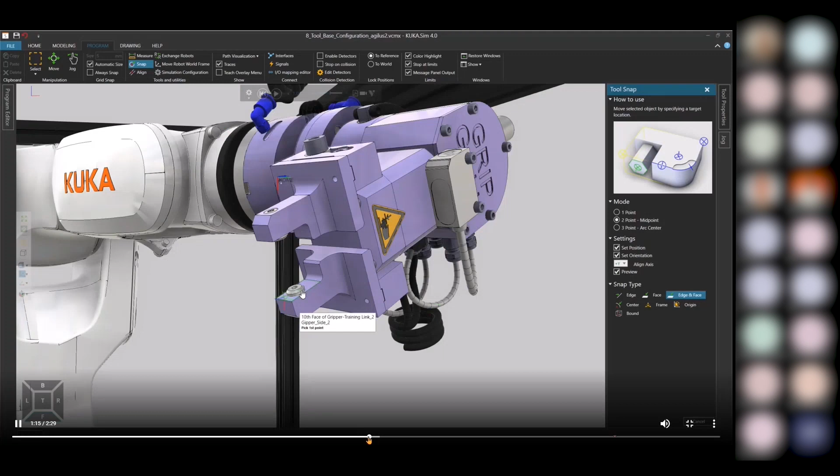In this video, they're explaining how you might use the snap function to define the tool center point using a 2-point method. Okay.

Moving on, I have a couple tips and tricks I wanted to show you with a live demo today. This has to do with just the user interface and how you can navigate through the user interface, how you would just get to know what that interface is giving you. So the first one is the RSL versus KRL view. I'm going to go ahead and switch to KUKA.Sim here. And I'm just going to open a program here for example.

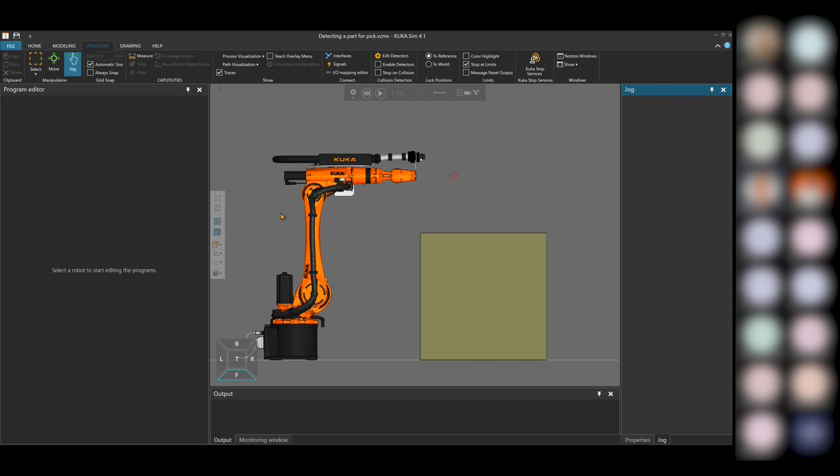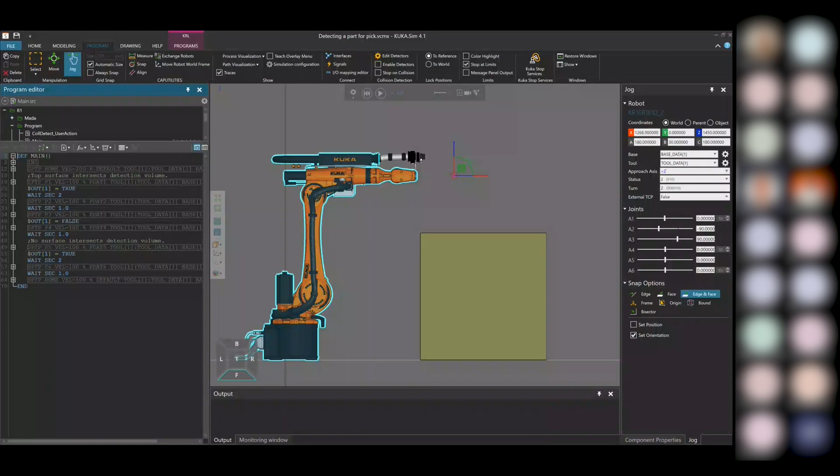And so when it says RSL versus KRL view, what we're concerned with is how the program is displayed in KUKA.Sim. What you see here is called an RSL format, or like a robot simple language. So we have a point-to-point move here, spline point-to-point. We have a wait move, another spline point-to-point, and output. This is not how it would look in KRL, but this little K button right here will allow you to switch to KRL view. So by clicking this button, it switches it into a KRL view, so it looks like it would show on the teach pendant itself.

One other thing that's kind of interesting here is if you select a point, you can also click on this light bulb and select change instruction. And then what it will do is load the button menu that you would normally see on the teach pendant if you were to modify that point. So here you can make whatever changes you normally would make, like change it to continuous and then say Command OK, and then it gives you a warning here, but then it would also show that that continuous parameter was added. And then just clicking the K again switches you back to the RSL view.

Program versus data or DAT file view. The other button that's next to the K is a D, and that D is for data view. When we switch to this view, what it gives you access to is the data file for that program. My main program has 6 points in it. If I switch to the KRL view, you can see the DAT file just like you would on the robot controller, or you could just look at it as a RSL view, which is just showing you basically how many points you have and what the names are.

Okay, the next item is the extended program view. And the extended program view refers to this area up here. So when I right click in this area, I can turn off the extended program view. This is how it would normally look when you launch KUKA.Sim for the first time. You do not see all the additional folders that are in the structure. So if you right click here and select extended program view, then you will have access to all the other folders that are in the program structure.

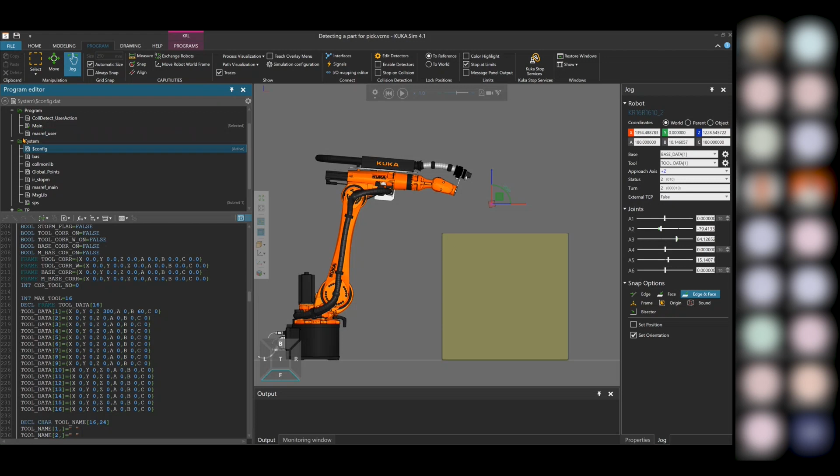Okay, view manipulation. Since KUKA.Sim is a 3D environment, it's just like any other CAD software. You can change your view. Right-clicking and moving my mouse allows me to orbit, so I can change the angle I'm looking at it from. Holding right and left mouse buttons together allows me to pan.

Another way to zoom is to hold the shift button and right mouse click and drag. That's an alternative way to zoom if you don't have a scroll wheel for some reason.

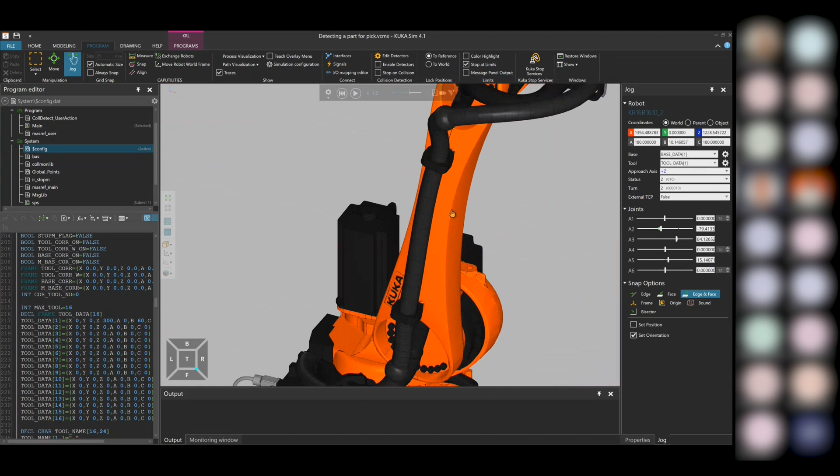The fill all button is another way to change the view within KUKA.Sim. If you're working on something very detailed, and you ever want to just show everything in the simulation, you can click this first button, the fill all button. That just zooms out and includes everything in the simulation into the view.

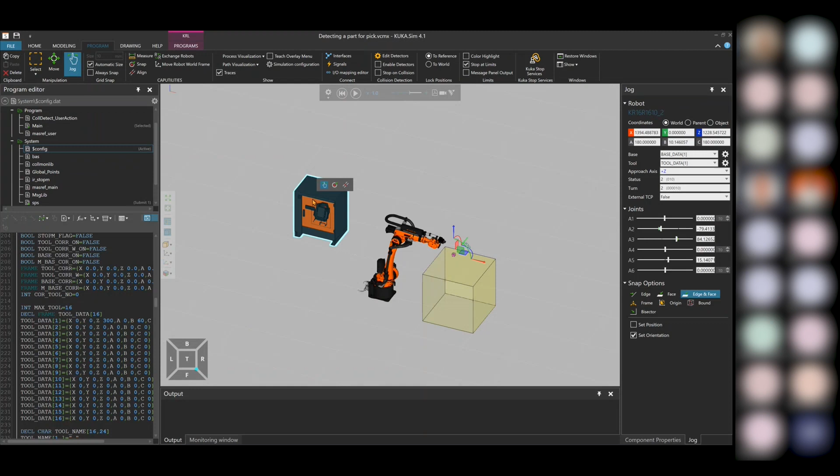The fill selected is the next button down, this one here. If I select the robot controller and click on fill selected, it will focus only on the controller. If I go back to fill all, I can select the robot and fill selected, or select the cube and fill selected, and it will focus in on the cube.

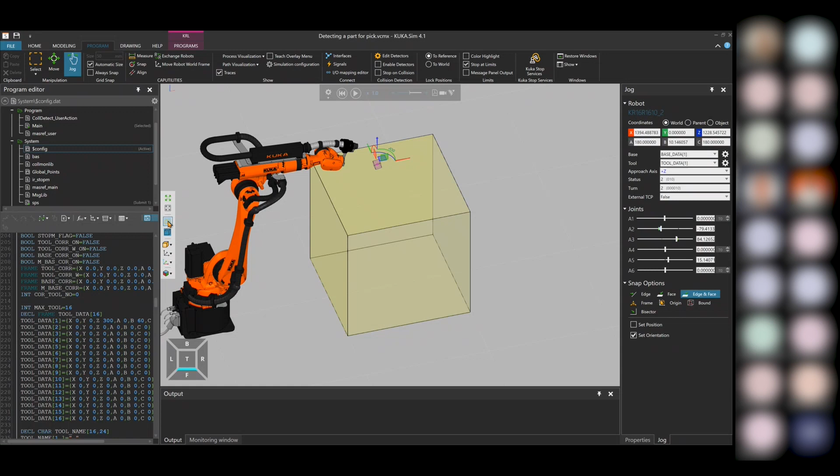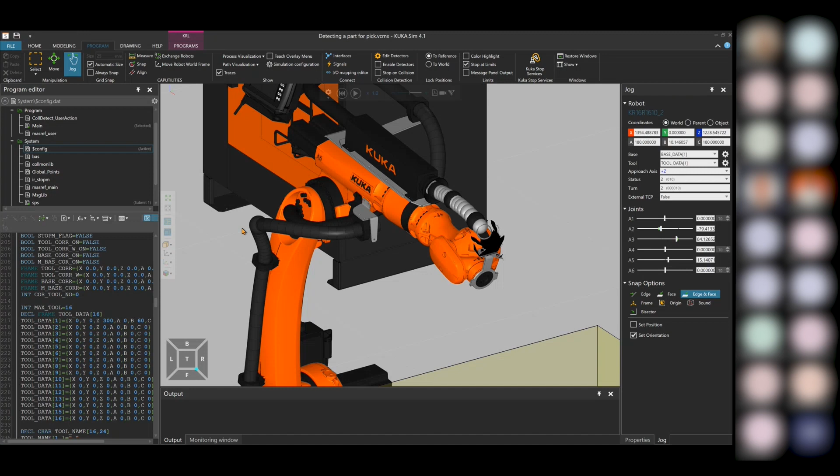The next button is the headlight button. What this does is change the look of the simulation. It's basically as if you had headlights on directly in front of you and turned those lights on. If I zoom in here, looking at the shadows of that robot, when I turn the lights on, you can see it brightens up. When I turn the lights off, it goes more to natural lighting. This is as if I had the headlights on, and you can see it brightens things up. If I turn the headlights off, it goes back to normal shading.

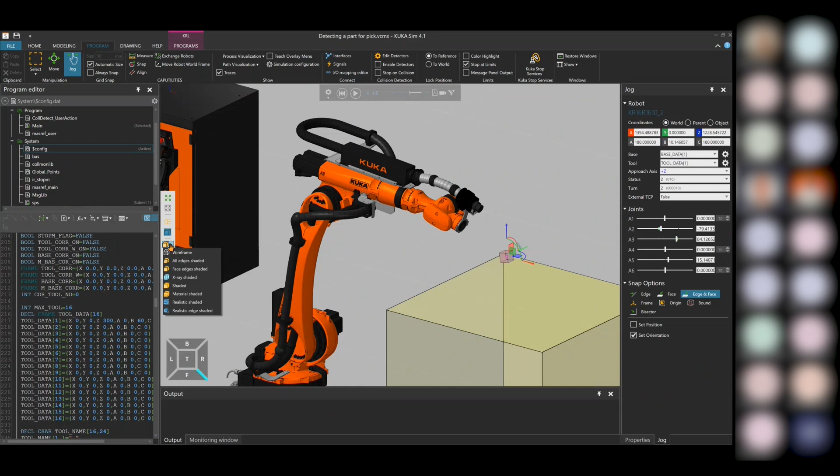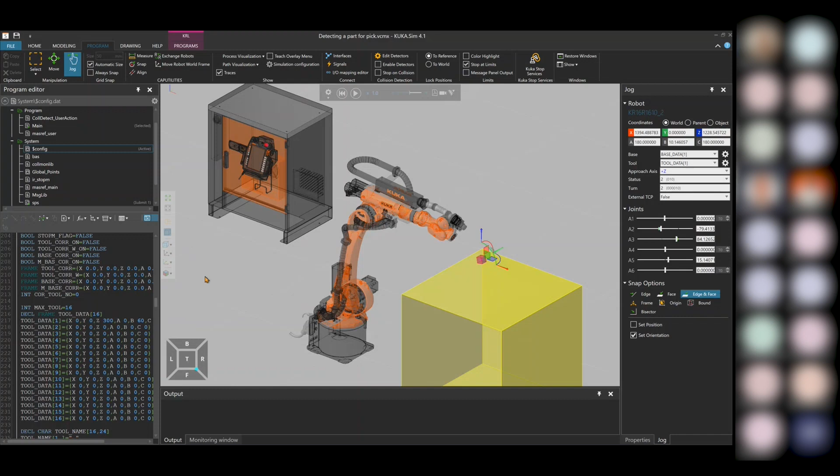Next is the render mode button, this button here. You have many different ways to visualize graphics in KUKA.Sim. If I go to wireframe, you'll notice everything just looks like wires, lines from the tessellated objects. I can go to faced only with edges shaded, or X-ray. These are just different view modes you can turn on. Obviously it's personal preference which one you might want to use.

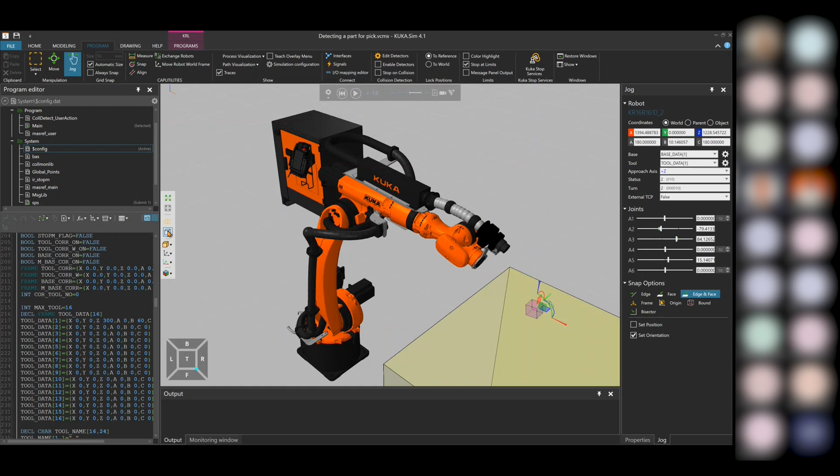One button I missed on my list is the orthographic button. This button is just like any other orthographic button in CAD software. If I turn it on, it turns on the perspective view, making things closer to me look bigger than things farther away. If I turn it off, you can see how the scale dramatically changes, versus if I turn it on, it looks more like it does in real life.

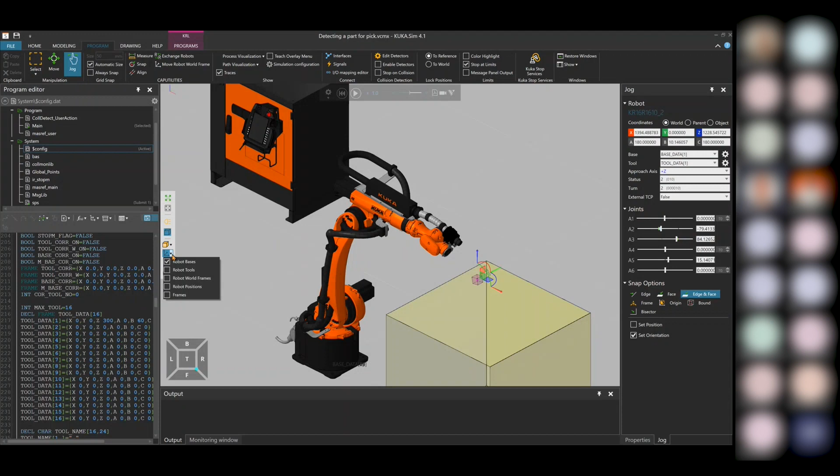Frame visibility, this button here. You can turn the frame visibility on and off by clicking on the icon itself. Now they're off; if I click the button, it turns it on. You can see this base data showed up because currently I have robot bases selected. When I click on this dropdown, I can turn on different frames to make visible or invisible, and then click on the icon itself to turn them all on or off.

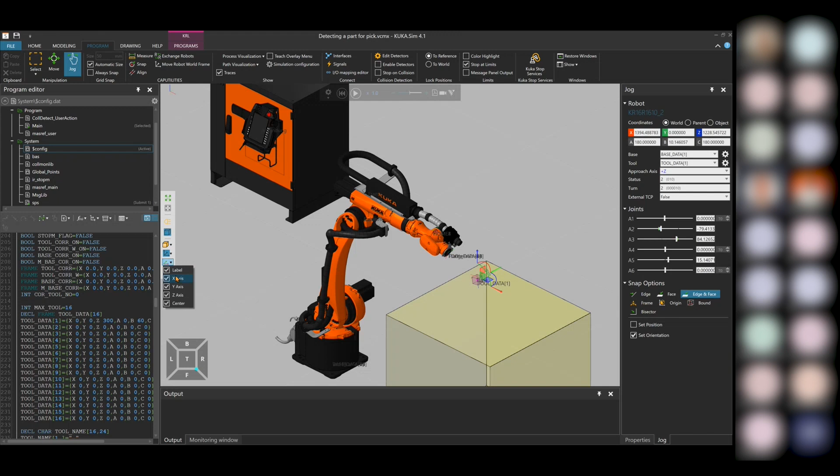Position frame display options is similar to the frame visibility. We can have the different positions and turn them on or off. For instance, right now you can see my points are kind of overlapped here, but by turning them on or off, I can use this button to change that.

And then view editor and view selector. That is wrapped up in this last one. So what this is referring to is the view of your current screen.

I don't have any views saved right now, but I can add a view by just clicking this plus button. So now I've created a view of this position and orientation.

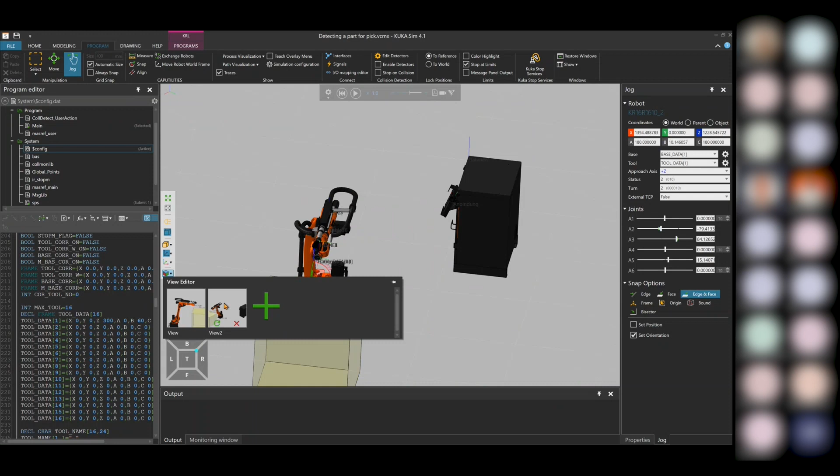I can move things around, move my camera view, and create a new view if I like. So now I have two views, and if I click on one versus the next, I can quickly switch back and forth between them.

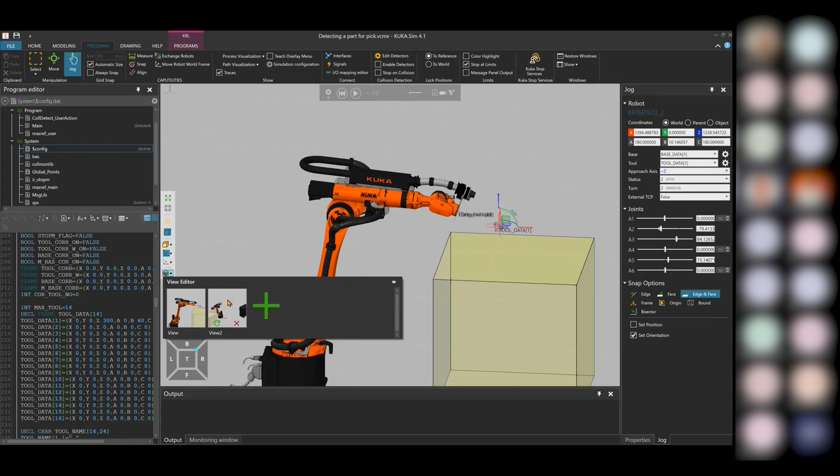This can be really helpful if you're always going back to the same location or working on the same thing and switching between two different locations. Also, these views can be used later when you export an animation or a 3D PDF - you can have the simulation switch views as it's running the program.

Okay, a couple more tips and tricks here. When you're zooming in on small objects, sometimes the graphics area appears to cut into the geometry, and you're not able to achieve the desired view. So what you can do is right-click on the area of interest and select Center in 3D View, and then the spot clicked will be centered in the view.

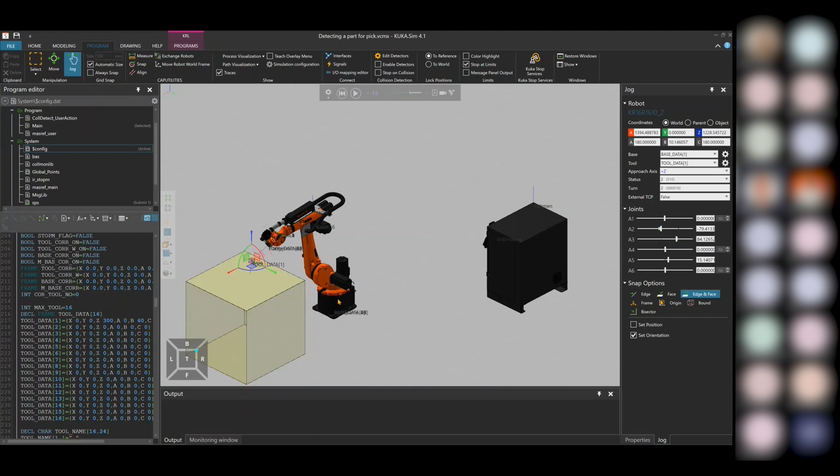I'm just going to demonstrate this for you rather than run these videos. Let's say, for instance, that I want to zoom in on this robot, this area here. As I zoom in, it looks like it might be centered on that.

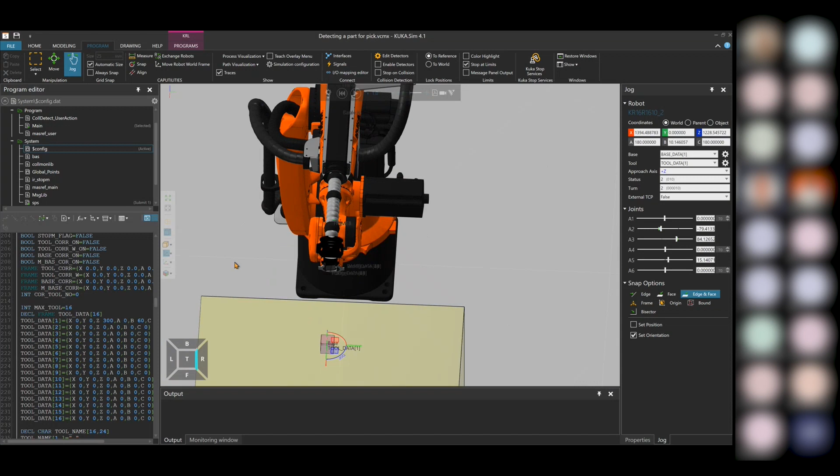For example, if I center here and I want to zoom in on the robot wrist, as I zoom in, you'll notice the wrist gets clipped. I can't zoom in any farther - it looks like it's actually disappearing on me. That's because I'm actually centered over here on my view.

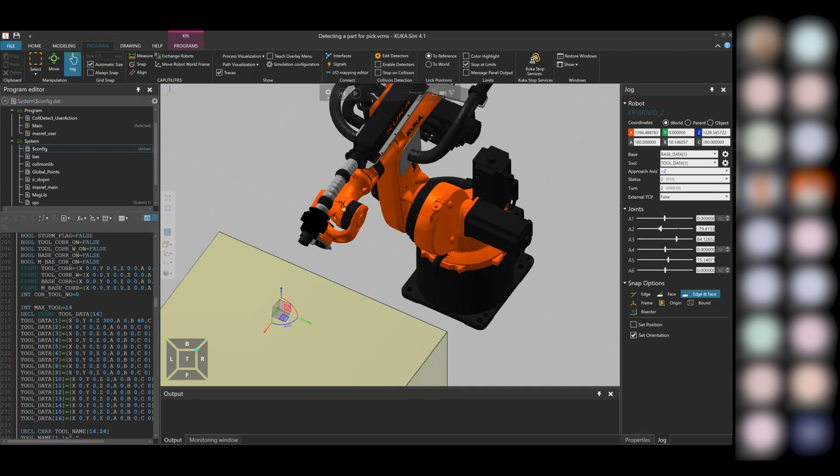So what I can do is right click where I want to zoom. Let's say right here - right click on that and Center in 3D View. Now when I zoom in, you can see I can zoom right in on that spot. And when I orbit, it's going to stay right there as the center of my view.

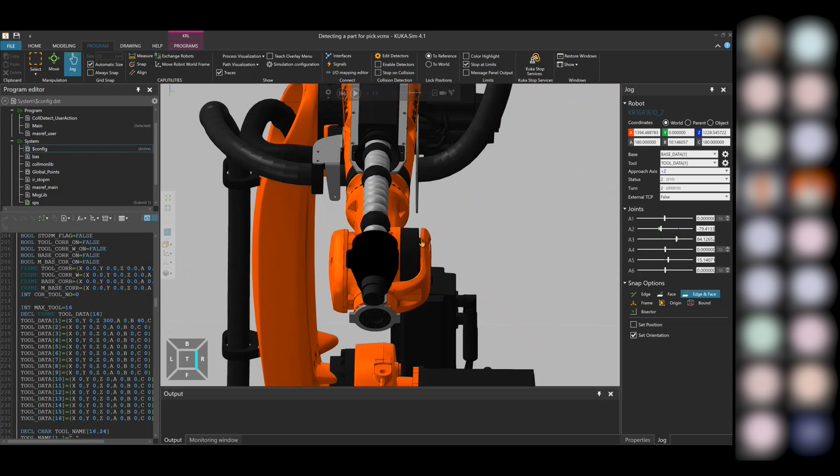Whether I'm zoomed in very close or zoomed far away, that same spot will be in the center of my view. So likewise, I can right click over here, Center in 3D View. Now that point is going to be the center of my view, and no matter what I do, I can zoom in very close or zoom out far from that. A shortcut to doing that is control right-click.

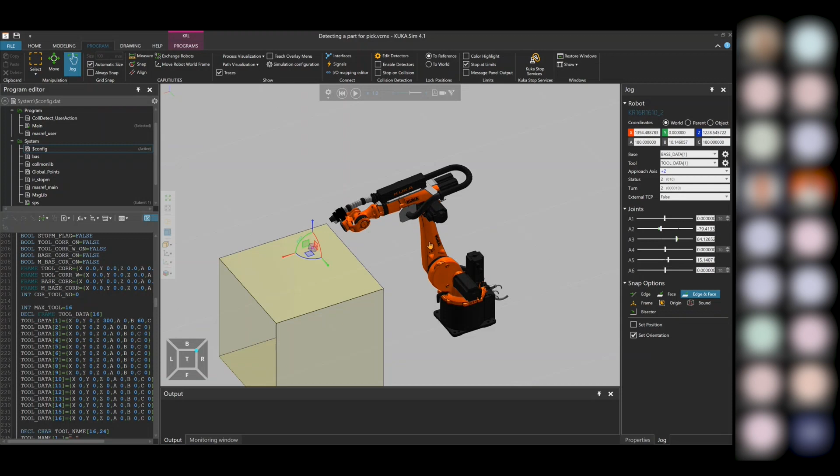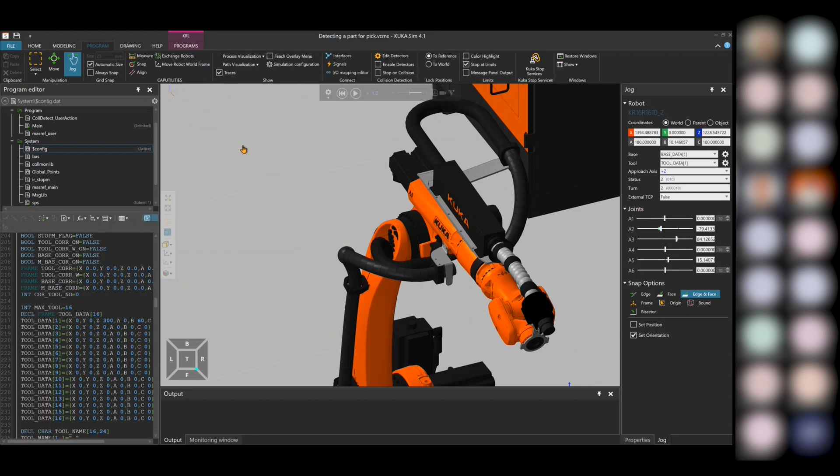So at this point, if I zoom out and I do a control right-click, holding control and right-clicking right there, it will cause that point to become the center of my 3D view. So you don't have to do the right click and select - you can just control right click, and now I've changed the center of my 3D view to where I clicked.

Okay, snap tool. What it does is it helps you move the origin of the selected object to a geometric feature of another object. The snap mode allows selection of the target location with 1, 2, or 3 geometric references.

In the case of 2-point selection, it will choose the midpoint of those two. And in the case of a 3-point selection, it will choose the center of the arc created by those 3 points. The snap settings define whether position, orientation, or both are changed when snapped. Finally, the snap type at the bottom is just a filter to make the target geometry easier to select.

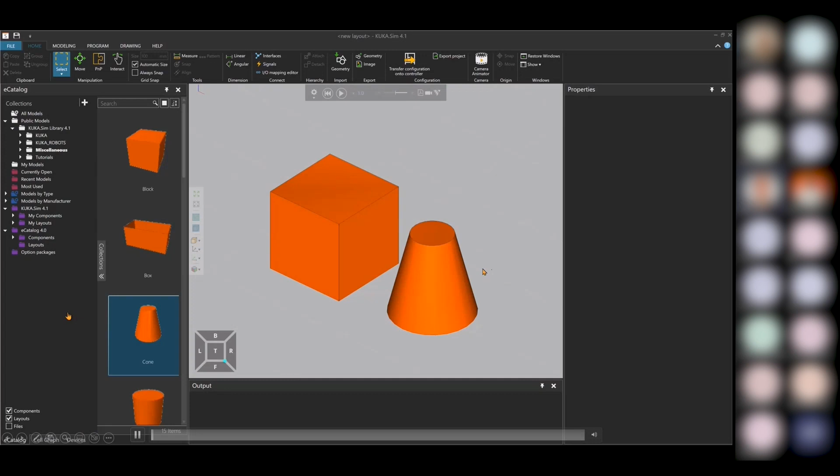So let's just watch a demonstration of that. I select the cone here, and then when I click on the move button, you'll notice the part origin is displayed. I can click on the handles and move those around like I normally would, or I can click on the snap button.

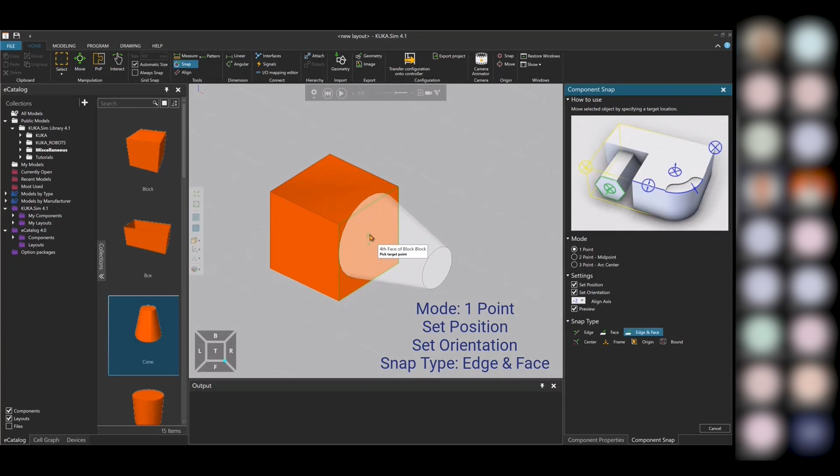So now you can see I have a 1-point snap and I'm setting position and orientation. It's going to put the orientation of the object normal to the surface, and it's also going to move the position to exactly where I click.

If I activate snap again and change the settings so that I'm just going to the center of the surface I select, then it snaps right to the middle of that surface. It doesn't move all around, it just goes right to the center.

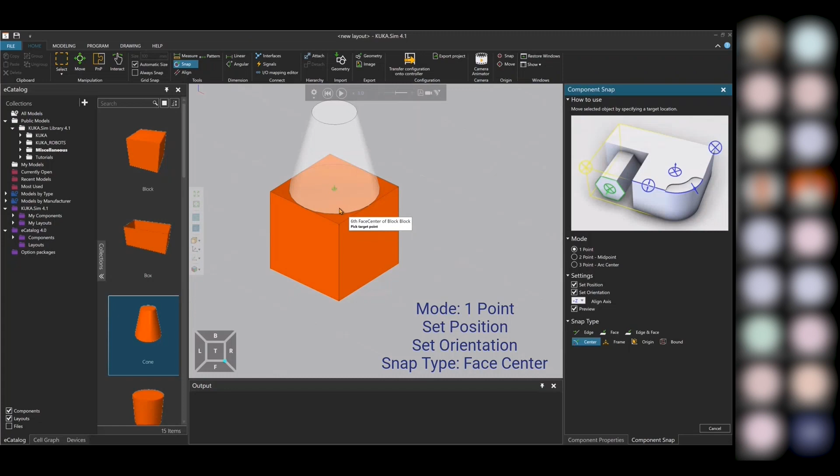And then we'll go ahead and snap one more time, and I can change the snap type to edge. So now it's only going to allow me to click on the edges of the geometry - it will not allow me to click on the faces of that box.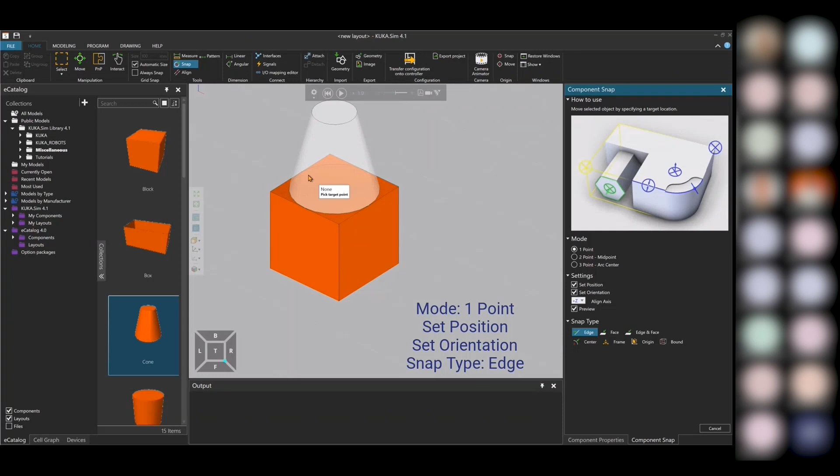We'll go one more time. Now I'm going to change it so that instead of doing the edge, I'm snapping on face. So now, just like before, it's allowing me to snap wherever, but it's not allowing me to click on the edge.

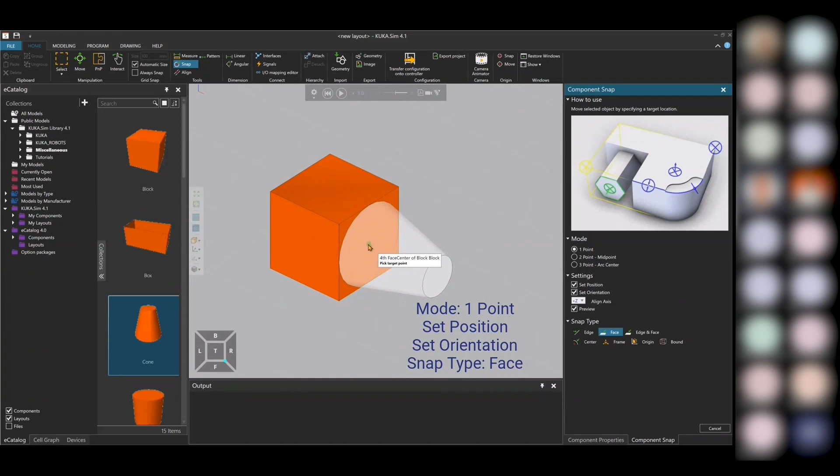Next, what we can do is snap with position only. So I'm unchecking the set orientation and allowing edge and face. Now it's going to maintain the same orientation regardless of what face or edge I select.

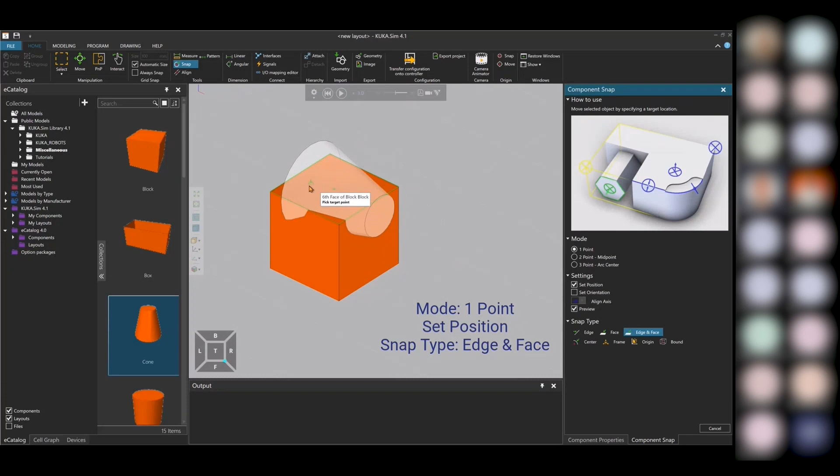We'll change the settings one more time. Now I'm going to do orientation, but not position. So the position of the cone will stay where it is, but I can change the orientation of the cone.

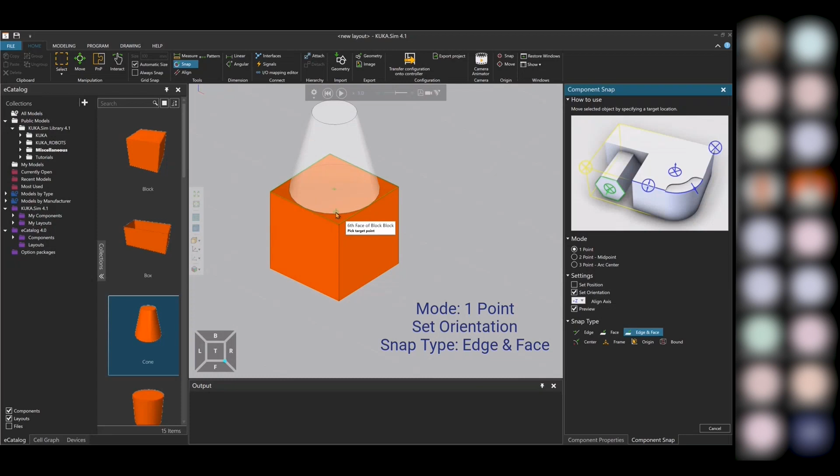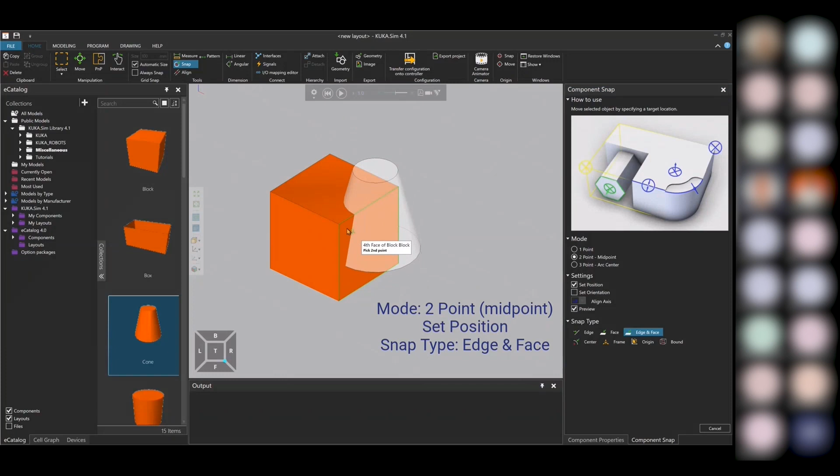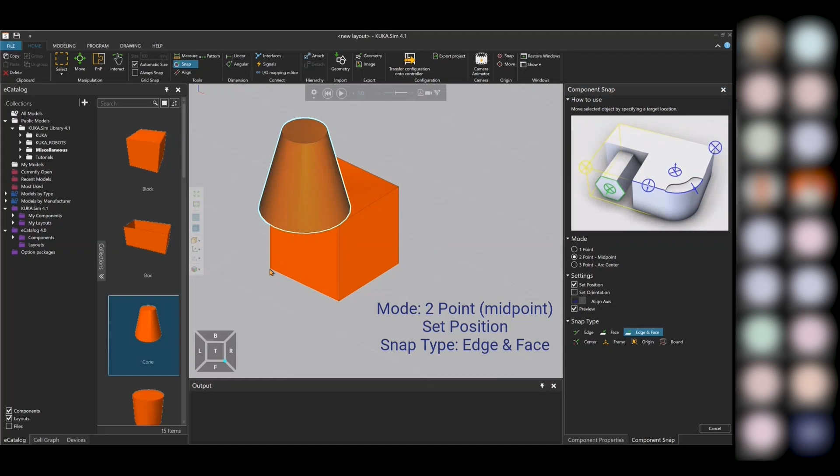Next, I'll show how to do a midpoint snap. It takes the two snap locations that I chose and snaps to the middle. If I choose the lower right corner and the upper left corner, it will choose the midpoint between those. Doing it again, I can choose the far corner and the center corner, and it does the midpoint, or the far corner at the bottom and the complete opposite corner, and it will snap right to the center of that cube.

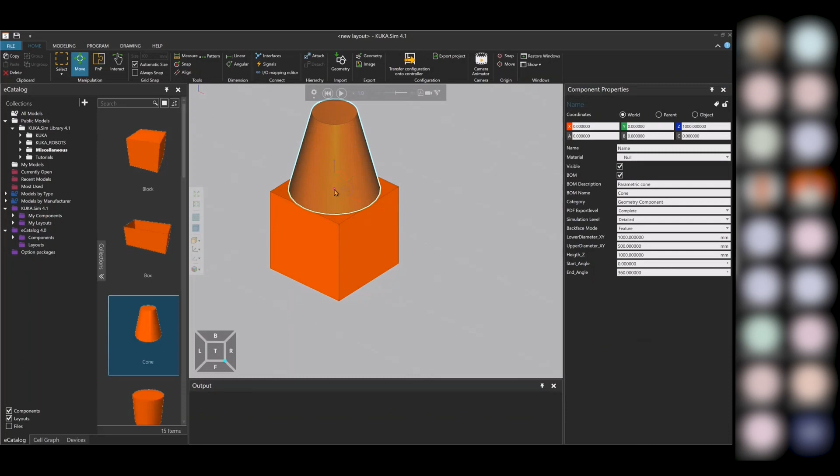So you can definitely use the snap tool to help improve your precision when you're creating your layouts.

The align tool is very similar, but it moves the object from the first geometry reference, typically part of that object, to another geometry reference of another object. It's different because snap always uses the origin of the object as its first reference point, whereas the align tool can use anything.

The align settings control how the selected object will move, just like the snap. Set position causes the selected object to move such that the exact point clicked is moved to the exact target location. Set projected position causes the selected object to move such that the alignment is satisfied with the fewest degrees of freedom changed. And set orientation allows orientation to be changed.

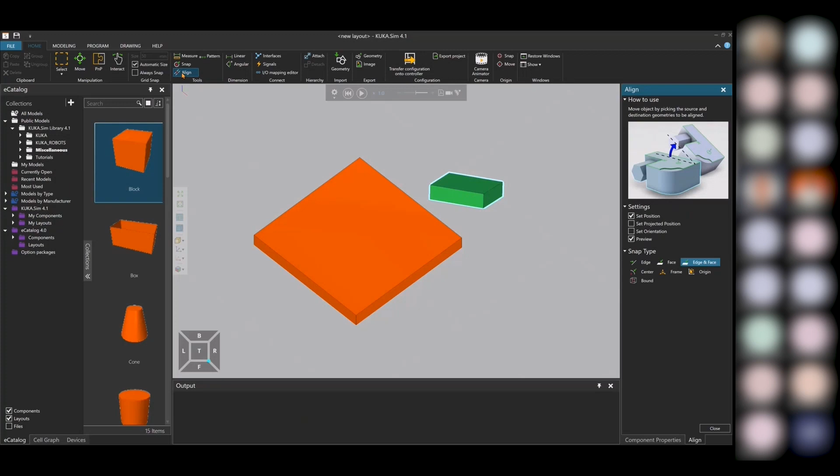So I have a couple videos here to show that. In this first one, I click on the box, activate the align tool, and then set up my settings: set projected position, set orientation, and use edges and faces.

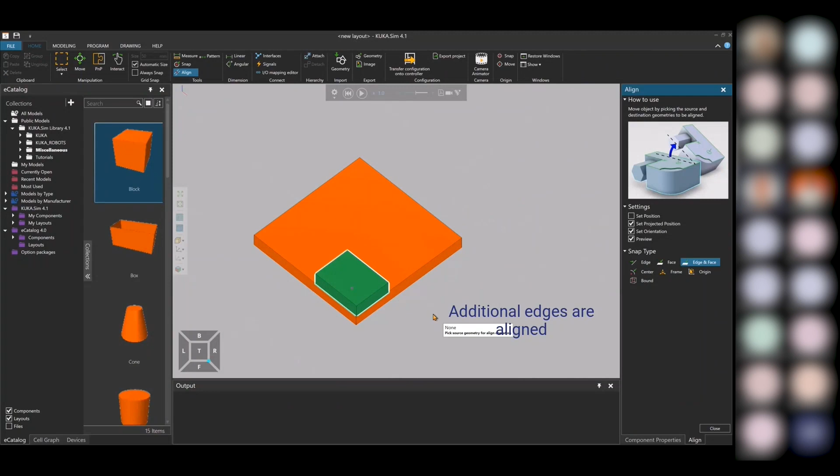I click on the first edge of the green box and the first edge of the orange box, and now those two edges are aligned. Then I click on the second edge of the green box and the second edge of the orange, and now those two edges are also aligned, maintaining that first alignment.

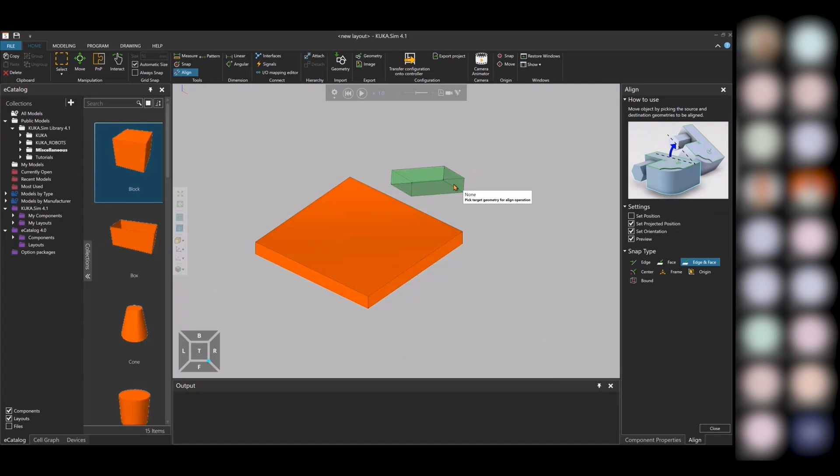Now, if I just move this box out of the way, we can try another scenario. So activate the align tool, and I selected the center of the face and the face of the orange. Now those two faces are aligned. Selecting the left faces of both, now those two are aligned.

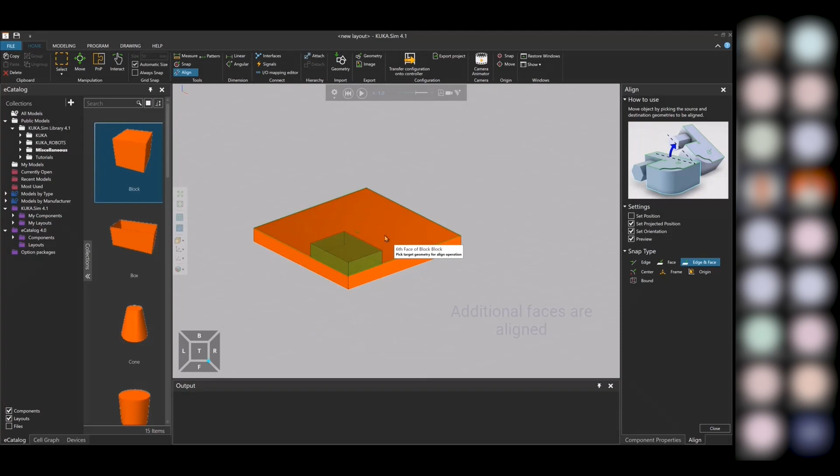You can see that they're directly above each other. Now I can select the bottom of the green box and the top of the orange, and now all three are aligned. Two different ways to get to the same result.

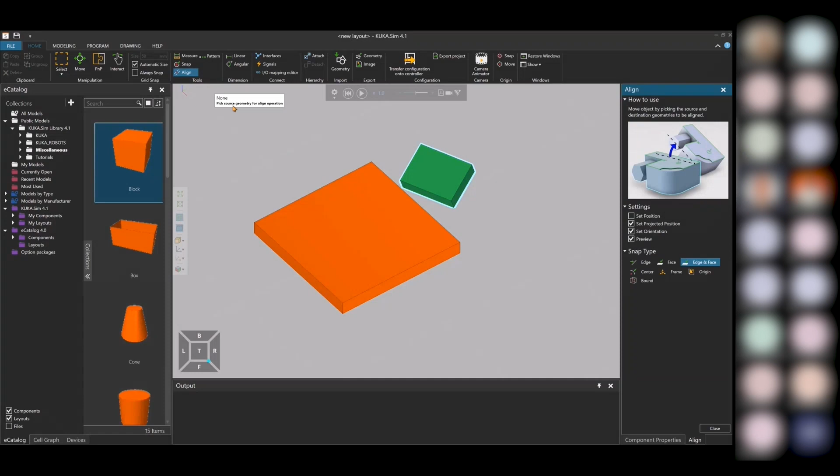This video shows the difference between set position versus set projected. Now we're using set position, just using the edge and face. If I click on the point, the corner of the box, it will now move the corner of that box to the exact position where I click.

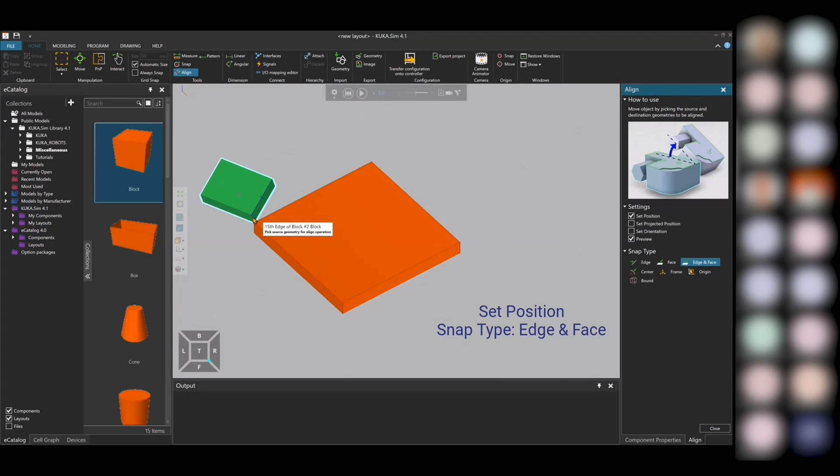These are functions that you're just going to have to play with to get the hang of, but you'll notice that I can move that corner to any point that I click on with the set position.

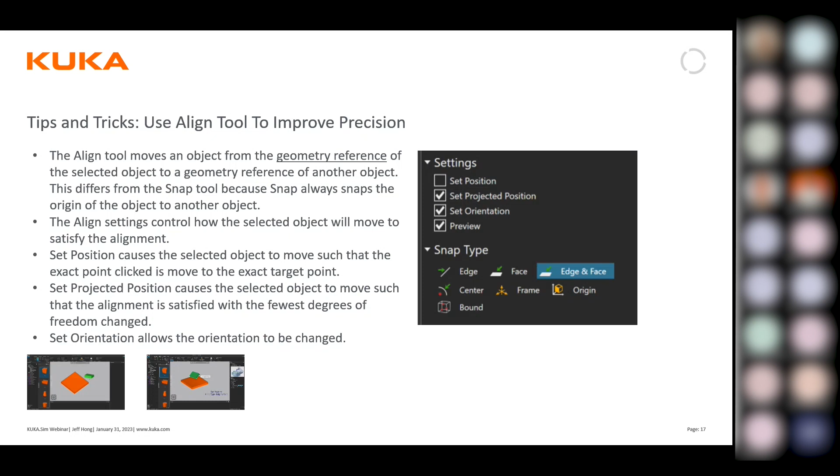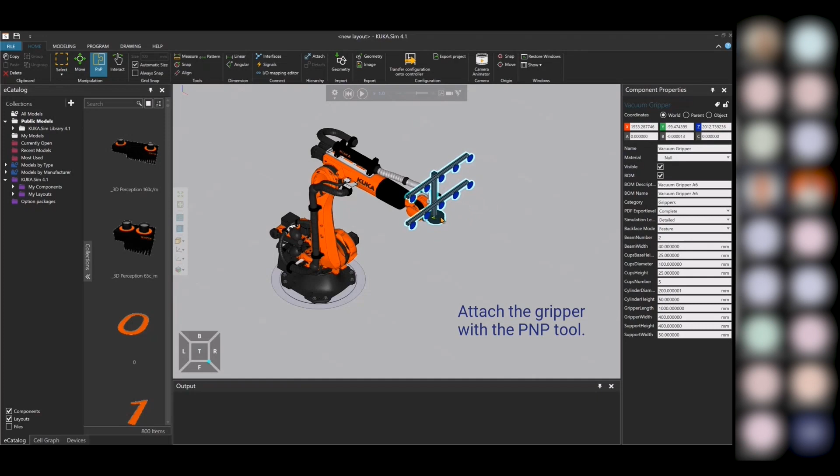First, we're going to just attach this tool. This is a standard gripper that's in KUKA.Sim. Using the PNP feature, I can go ahead and grab that tool and then move it closer to the robot, and it should snap right on there.

After I snap the tool on, I can click on the program tab and then click on the robot to access the jog tab.

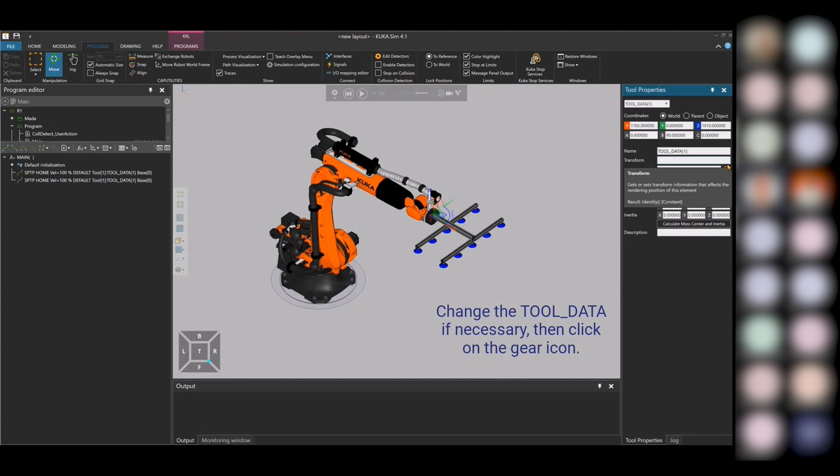Next, I will select the tool data that I want and click on the gear to activate the tool data definition. Now you'll see the handles. I can just drag the tool data by using these jog handles, just like you would position anything else in KUKA.Sim.

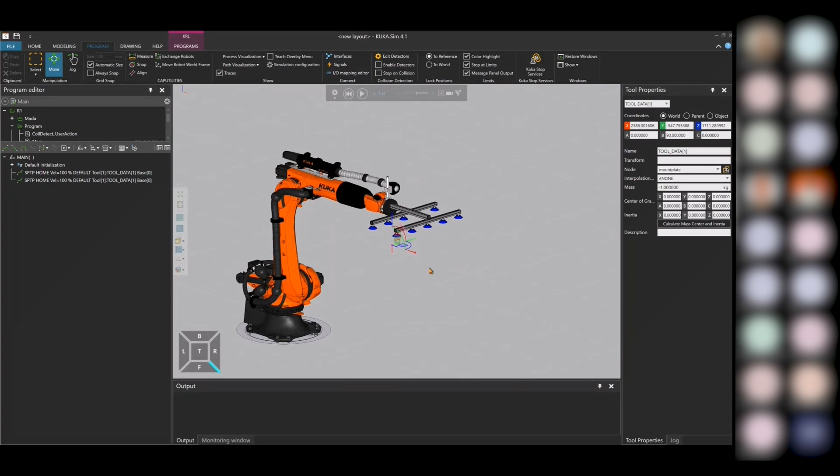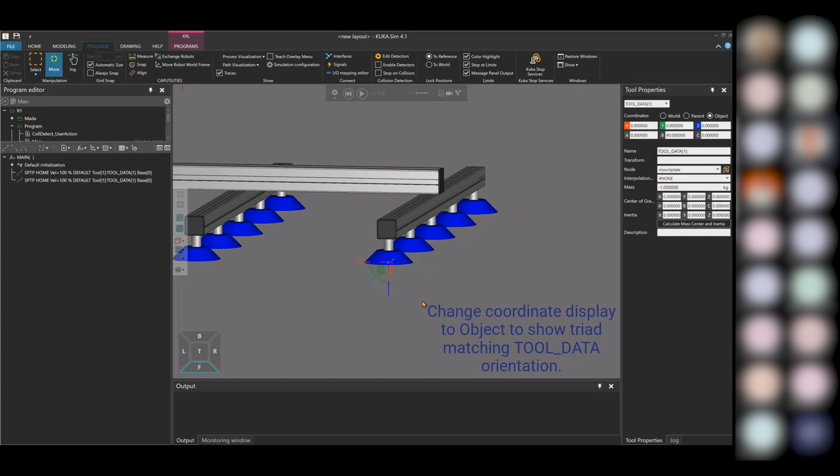If I want to put that precisely in the center of that cup, I can also snap, just like the snap function we already demonstrated, and snap directly to the center of that cup. If I switch the coordinate system display, it will show you the triad in the tool orientation. So now if I change the orientation, it will reflect that the Z is now pointing out of that cup.

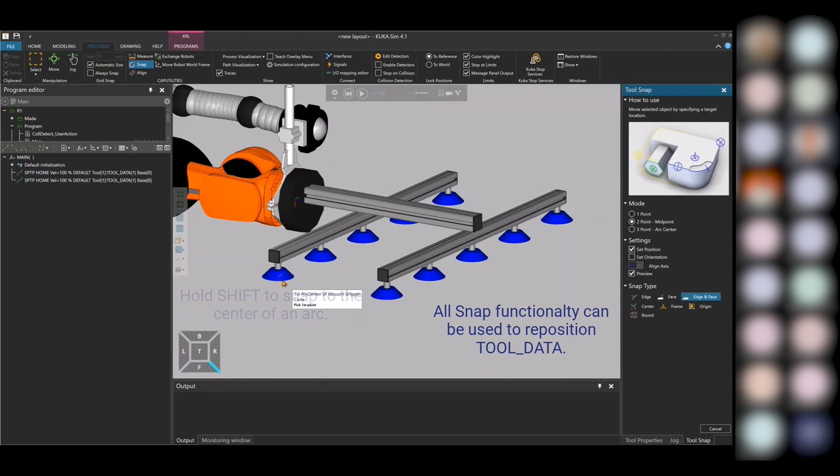Next, I can select a different tool data if I want. And then using the snap function, I can snap to the center of that grid pattern. So I can hold shift and select the center of this first cup. And then as my second reference point for the 2-point snap, I can hold shift and select the center of the second cup. And then you'll notice that the tool data is now defined in the middle of that 10-cup gripper.

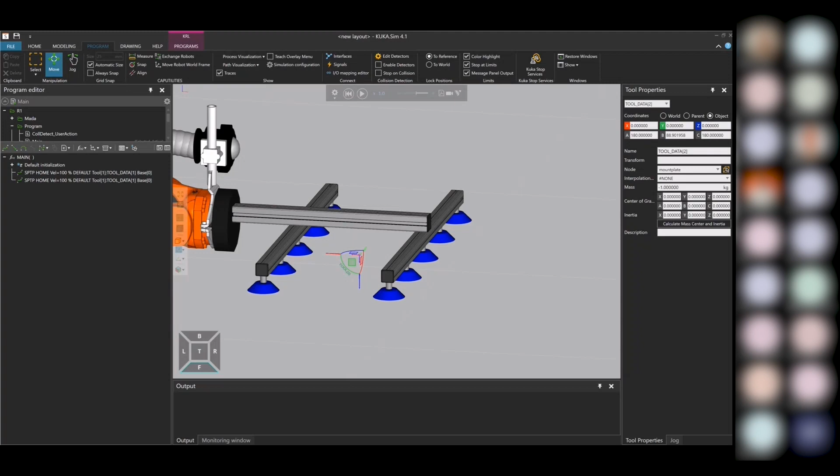Again, I can rotate my orientation by 90 degrees so that the Z value is pointing normal to the face of the cups. That's it. Defining the base data is the same as defining the tool data. It's just using the base data instead, selecting the gear next to the base data instead.

Okay, I have a couple more. We're getting close to our 45 minutes mark here. So let's see if I can just go through these fairly quickly.

This is discussing how to detect a part for picking. So what KUKA.Sim does is that there's a detection volume that is attached to each tool data. And that detection volume is used to determine whether or not there's an object available to be picked. KUKA.Sim will only recognize an object if its surface intersects the detection volume, and there's no tool required in order to pick an object. So in this first image here, my detection volume is on the inside of this box.

So there's no surface cutting through this detection volume. And so because of that, this object is not detected. If the detection volume was moved so that the top surface of this box intersected the detection volume, then KUKA.Sim will recognize that, hey, there's an object here. If the output is turned on, then that's the object that I will pick.

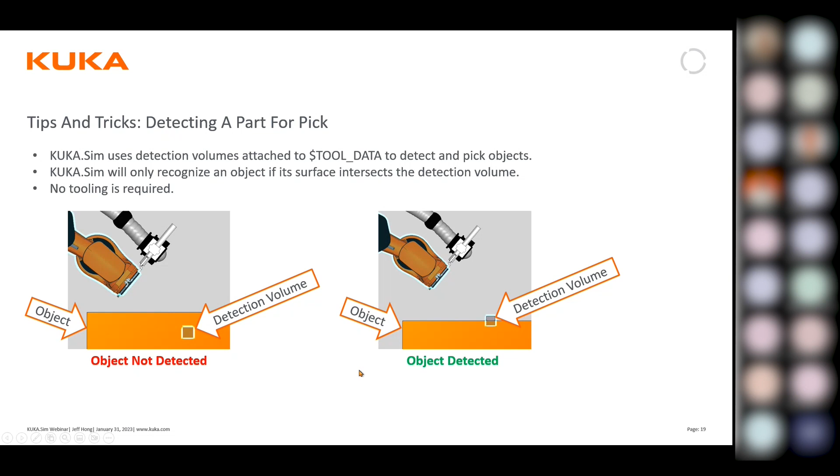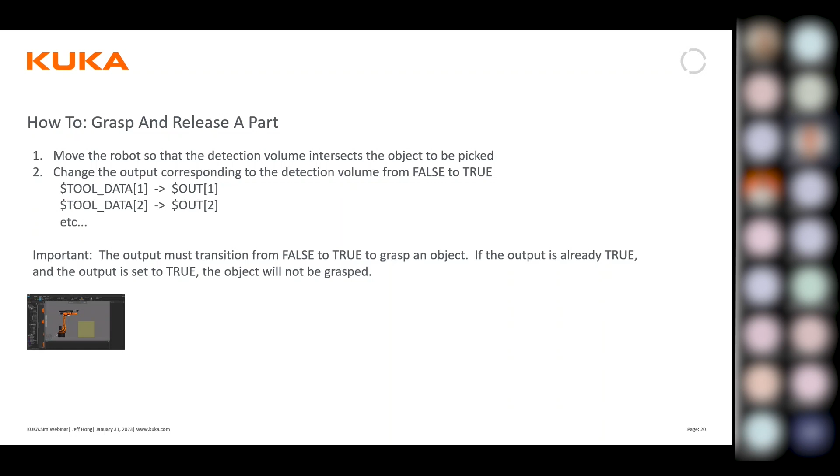So in order to pick an object, you have to move the robot so that the detection volume intersects the object to be picked. Then you have to change the output that corresponds to that detection volume from false to true. So for tool data 1, you would turn on output 1. Tool data 2 is output 2, etc. An important note, the output must transition from false to true to grasp an object. If the output is already true and the output is set to true again, then the object will not be grasped.

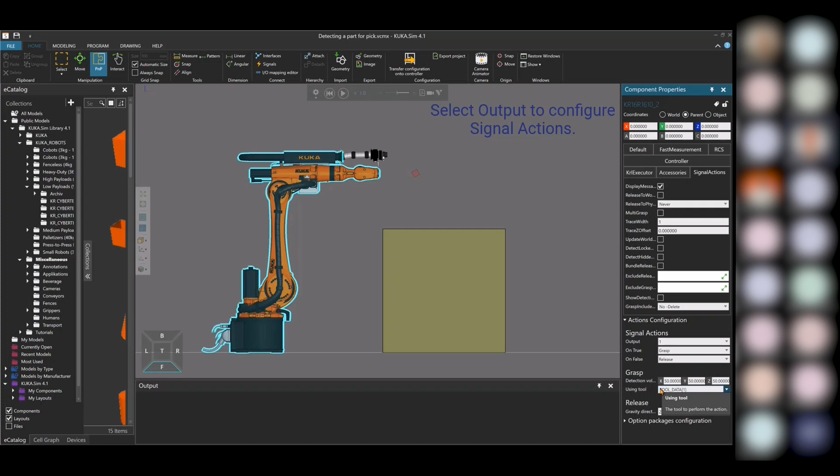So here is a video showing this exact same thing. You can turn on the display messages so you can see what is actually happening when the outputs are fired. And you'll notice if you go to the signal actions that output 1 is set to be grasped or released based on true or false, and the detection volume size is specified by default to be 10 millimeters cubed.

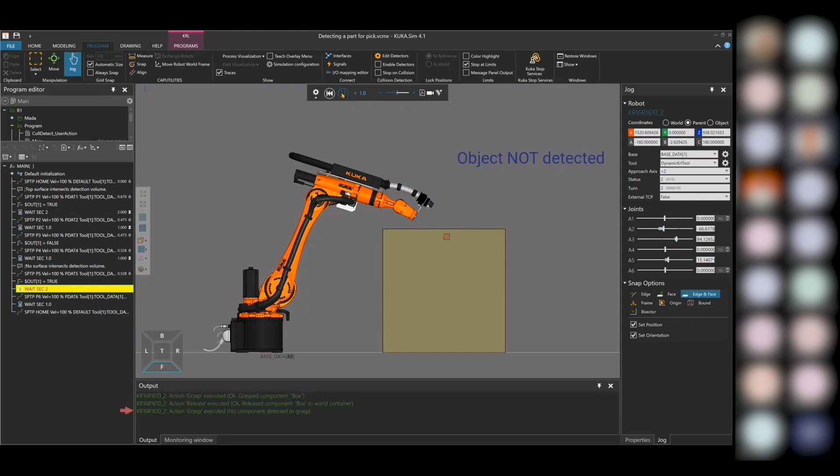So when we run the simulation, you'll notice that the robot will move down and the object is detected, so it picks the object. The robot puts it back down and moves so that the detection volume is inside the object, and you'll notice that it did not pick that object.

Going back to the display here, you'll see that the first time it actually tried to grasp the object, it said that it was okay. Grasp component is box. And then the release action was okay, released component box to the world container. However, the next time we went to grasp again, it indicates that no component was detected to grasp. So we have to make sure that the detection volume intersects the surface of what you want to pick.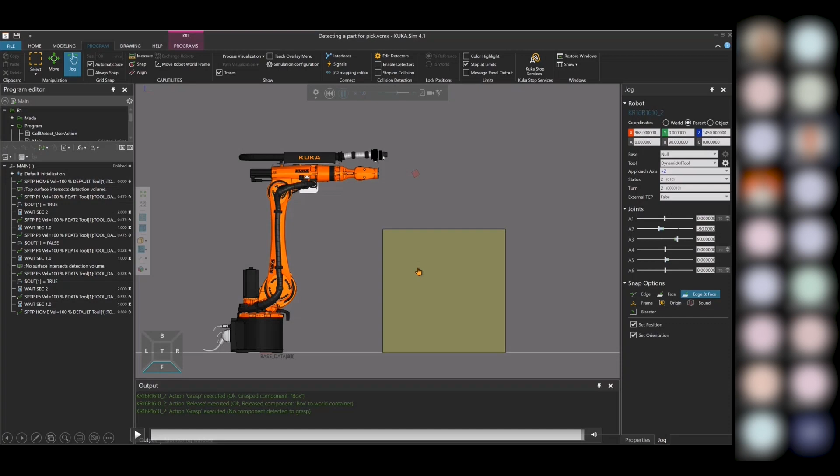Also, you can change multiple parameters in multiple statements at once. So if I click, let's say, multiple move positions or multiple wait statements, I can change all of them at the same time with the same value. The properties dialog will show which properties are the same and which ones are different. If the statements have no common properties, only the number of objects selected will be displayed, and changes to the properties will affect all selected statements.

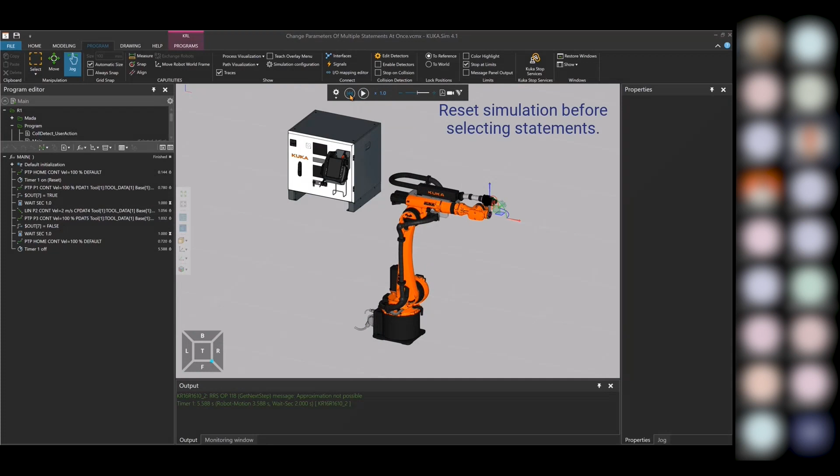Here's an example of that. So I'll just run the program here so you can see what the robot does. It moves to a position, waits for a second, moves to a couple more, waits, and returns home. So now what I can do is click the timer and hold Control and click the other timer. And you'll see now 2 objects were selected, and I can change both timer values from timer 1 to timer 5.

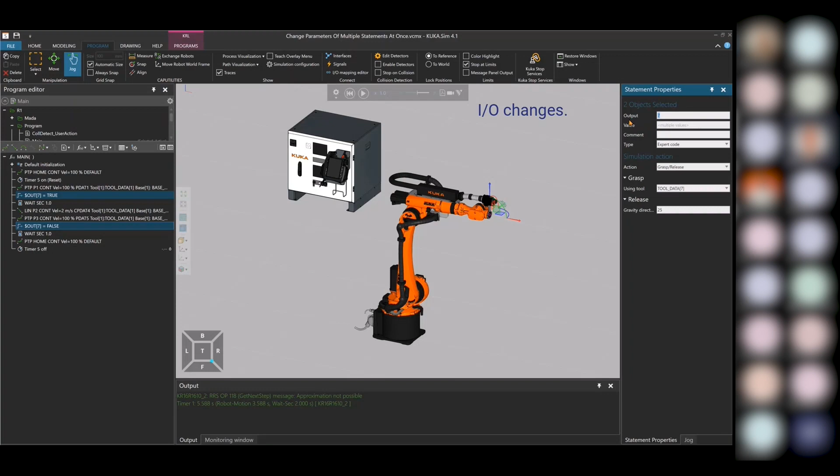Or I can select output 7 and output 7 with the Control key, and I can change both of the output values and use output 1 instead. Likewise, I can do the same with the wait statements. By selecting both using Control, I can change the waiting time to be 2.5 seconds. And lastly, I can select multiple move statements, and it will allow me to make changes to that as well.

But at this point, I want to highlight something very quick here. You'll notice that there are some fields that show values in them, and some that indicate that there are multiple values. So for instance, in this motion here, it says multiple values because the first one I selected was a linear move and the second one was a point to point. If I changed that, then it would set all of the selected statements to have the same value that I change it to.

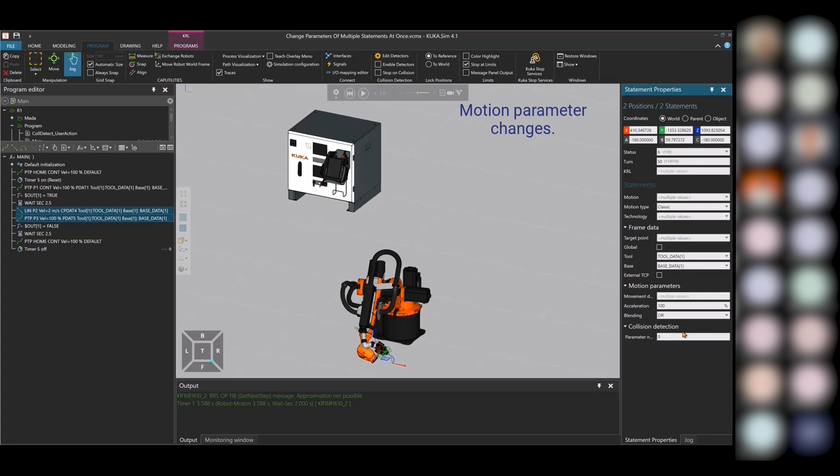In this video here, I'm just showing you that there are some that have multiple values and others that do not. And I'm turning the blending off. So now you can see the continuous was removed from both of those statements. And so when we run that program again, you can see the difference in the program. The timer values have increased. It was not moving continuously on those 2 points.

Okay, so I think at this time, Sue, I'm going to go ahead and end my presentation here. I think I had a couple more, but I want to make sure I address any questions that have come up at this time. Yep, we have some questions. First one is from Eric.

What OS is supported for the license server? The license server can be Windows 10, so for a regular PC. It's also supported on any of the enterprise servers. If he can email us which server he has, I can confirm it, but I don't think I have a comprehensive list.

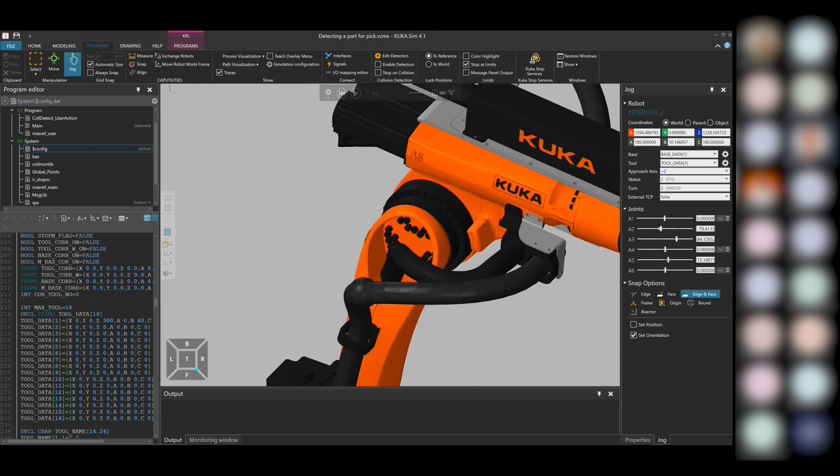Okay. Next question, Hugh asked, can STEP files of an entire robot cell be imported? Yes. Actually, KUKA.Sim does a really good job at importing CAD data. Let me switch over here to KUKA.Sim just to show you: from the Home tab, we can import geometry, and we can support just about any CAD software format that you can think of. Most of it's solid data that we're importing, even though after it's imported, it becomes tessellated surface data, but it does import quite a few different types of data.

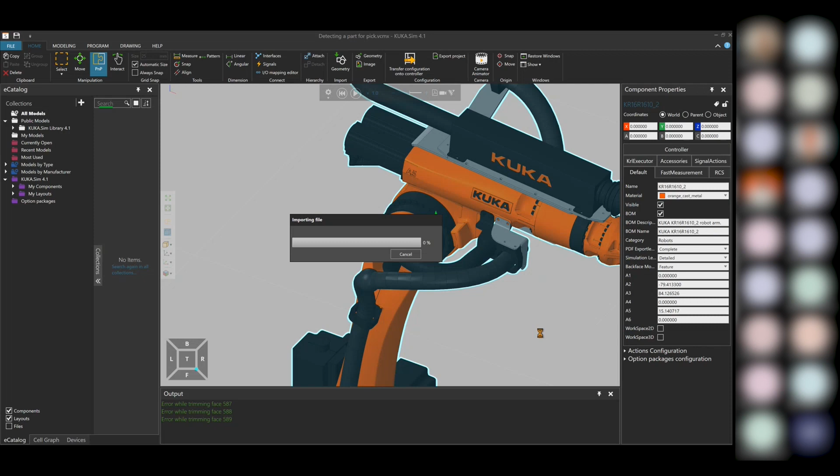This is a spot gun that I had available here, and I'll just import this quickly just to show you what that does. But we can import a whole cell. Then after you import the cell, you would have to potentially break it up in order to change colors of things or whatnot. Or another thing that you can do is, how do I say this, you can import certain pieces and then reassemble them inside of KUKA.Sim, and that will help to make it more manageable in KUKA.Sim. But in this case, here's the spot gun that I just imported.

And it actually does a really good job with the import. It's much better than the previous versions. Any other questions? Yep. Can we import a WV project into KUKA.Sim? WV, I'm wondering if that stands for WorkVisual. Currently that is not supported.

In a future version, we will support that, and the plan for KUKA.Sim and WorkVisual is that those two pieces of software will actually be merged together into one. But that's not expected to happen until, I believe, KUKA System Software version 9. So probably not for over a year before that's going to happen. Currently, what we can do is if you create a project in KUKA.Sim, you can export that project as a WorkVisual project. You just cannot import one yet.

Okay, next question. How would you connect KUKA.Sim to OfficeLite and be able to jog from OfficeLite and see the robot move in KUKA.Sim? Yeah, so currently the current release of OfficeLite is using the Hyper-V image. And so we have separate instructions on how to do that, how to launch OfficeLite and license it and that kind of thing.

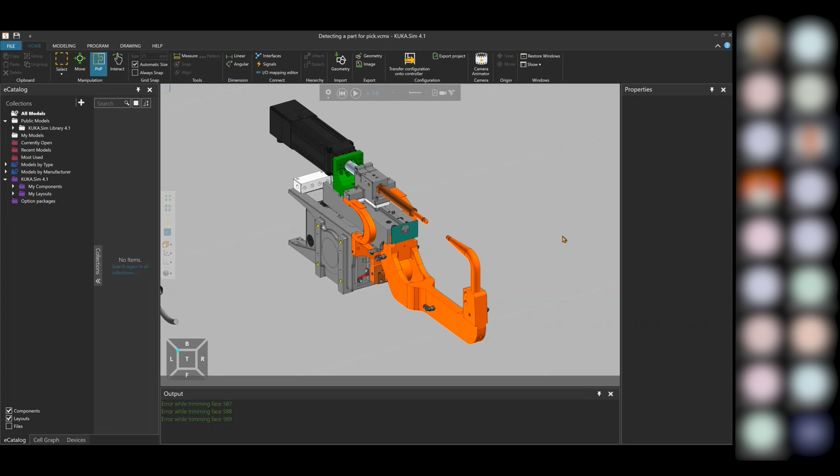But essentially what you would do is after you get OfficeLite running, I don't have OfficeLite running right now, but I can show you here from the program tab. You can click on this gear here and then change this to be controller. And then from here, you would click on this button and then find the OfficeLite controller that you want to connect to. And then after you select that, this connection status should change to be connected.

And then from there, depending on what you have set up, like for instance, if you had synchronizing here, and you had OfficeLite set up with the T1 mode, then you should be able to jog OfficeLite and see the robot moving.

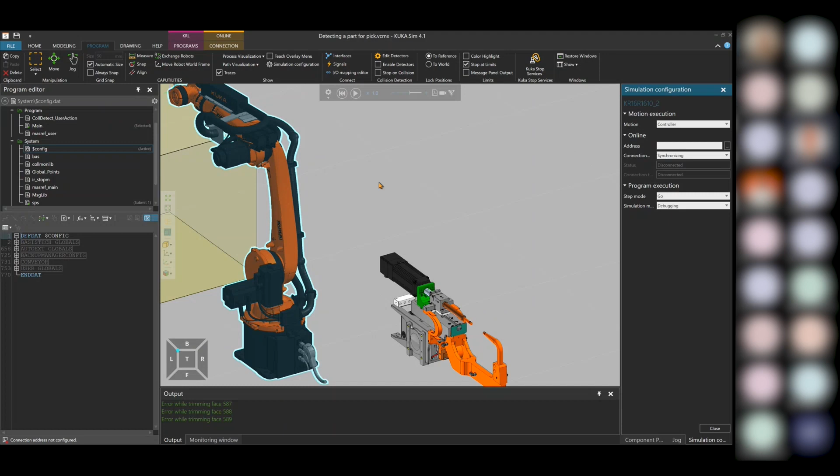Okay, 2 more questions. Can tool or base data frames be pulled in from a config.dat file loaded into the virtual controller? It's not as straightforward as that, but what you could do is, because I have access to the config.dat within KUKA.Sim, you can just copy it from your config.dat. So for instance, here's config.dat here. If you just expand this and scroll down to your tool data here, load data, here's base data, here's your tool data.

You could take your tool data and write it. Actually, what you would have to do, because this config.dat is actually generated from KUKA.Sim, you would have to take your tool data, like for instance, let's take these tool data here. Let's say I copied that from my existing tool data. Then I can go into my main program, and then I could paste it here. Let's paste it at the top.

I have to be in KRL mode here, so let's paste it to the top. There we go. So I just pasted in the tool data. These tool data here, I pasted in. Actually, this is supposed to be part of it. So you could copy the tool data and paste it into your program, and then that way, when you execute the program, the tool data will be updated.

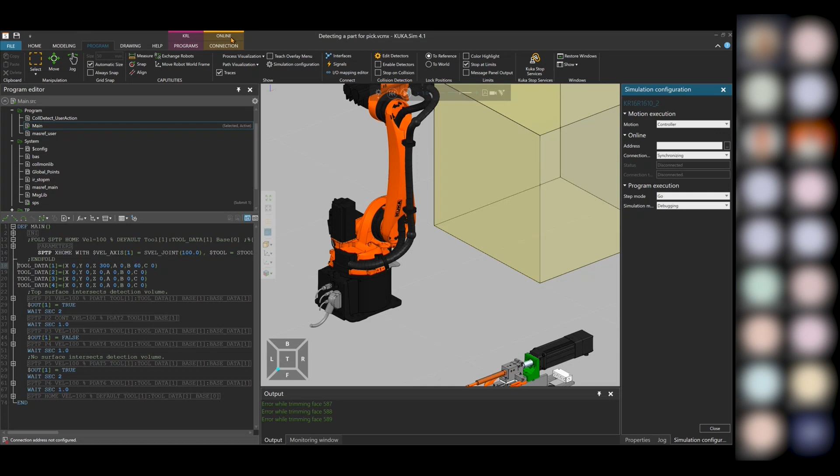Okay, and last question. Some of the robot models are not listed in the catalog. For example, KR6 R700-2. Can it be downloaded somewhere? So all the robot models that are valid for that version of KUKA.Sim are already in the catalog. Can you repeat what that model was again, Sue? The KR6 R700-2. Okay, so that would be a small robot, and here's the Agilus-2 series, KR6 R700-2. Here's the ceiling. Here it is. So KR6 R700-2. So it should be in there.

You can also, if you're looking for a particular model, click on this folder here, and you can type in a search term like R700, and then all those robots should show up. I wonder if it's case sensitive, R700. Let's try one more time. What if I select all models? There we go. So from all models, I typed in R700 and it showed me all the R700 robots that are available.